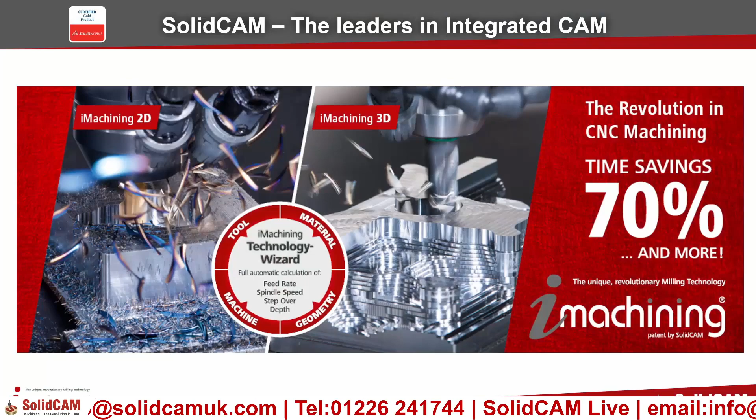So we're first going to have a look at a presentation of SolidCAM, looking at the features and benefits, and also have a demonstration inside the software of the part that's been programmed for today's seminar and how it's been programmed. Then we will cut back to the cameras in the machine to have a look at this being cut live.

SolidCAM are leaders in integrated CAM. The major benefits of using SolidCAM inside SolidWorks are that we have the same look and feel through a seamless single window integration. There is full associativity inside SolidWorks as well, so any model changes made will automatically update the toolpaths in SolidCAM.

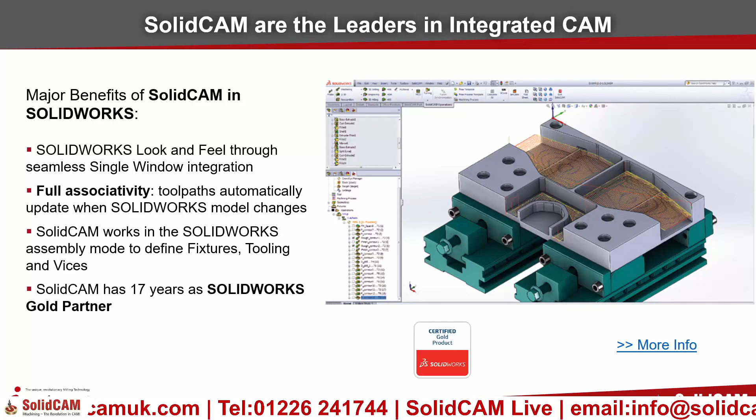SolidCAM works inside the SolidWorks assembly mode to define fixtures, tooling and vices, and we've also been gold partners with SolidWorks for the last 17 years. We have a complete integrated solution inside SolidWorks.

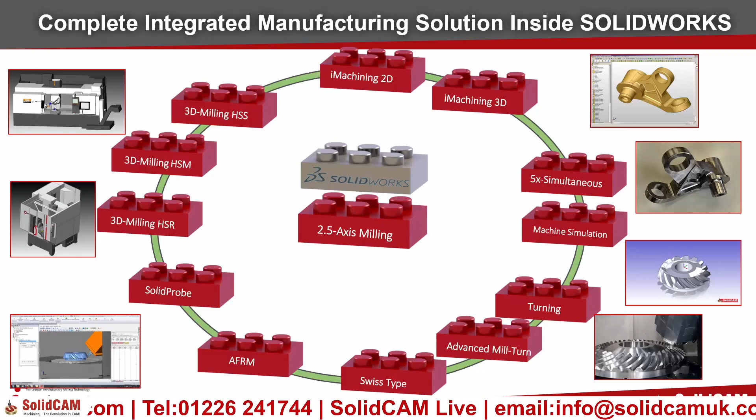We are a modular system, so we can add the specific modules needed, and when needed as well, so you don't have to have all the modules all at once. If you buy a new machine and need extra modules, these can be plugged in afterwards.

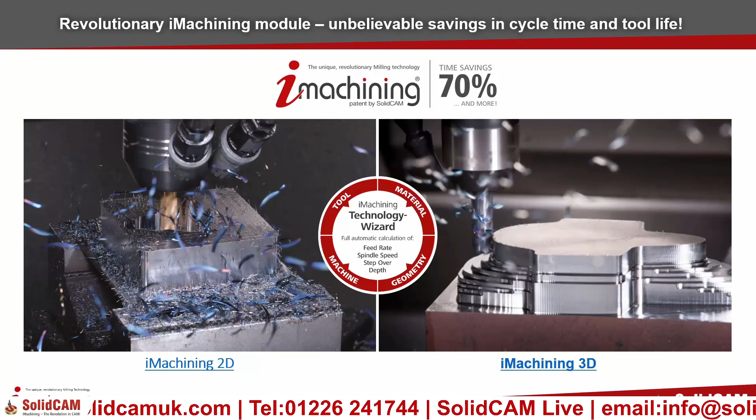Moving on to our iMachining module. This is our high-speed roughing operation inside SolidCAM with a technology wizard built in as well. We get increased productivity due to shorter cycle times, up to 70% and more cycle time saving. We dramatically increase the tool life and achieve unmatched hard material machining as well.

We see outstanding performance when using small tools, and we can use iMachining on 4-axis machines, 5-axis machines, and mill-turn machines as well. High programming productivity and a very short learning curve. The unique wizard will optimize the feeds and speeds for you, including the depth of cut based on the stock and tool material, as well as the machine specifications. So this takes the headache out of programming these high-speed roughing operations.

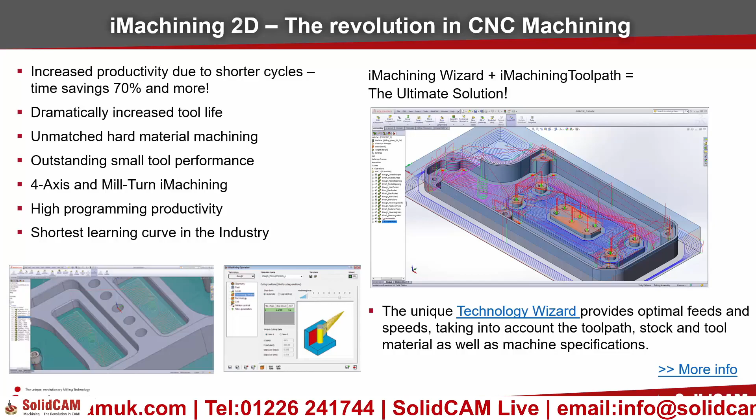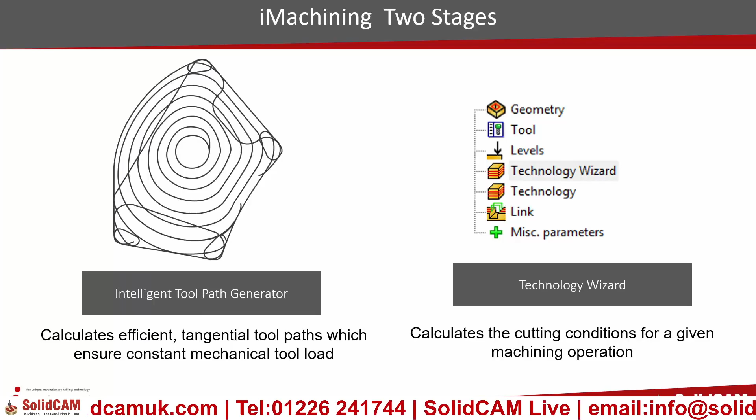iMachining comes in two stages, all built into the same operation. The first stage is to create an intelligent toolpath, an efficient tangential toolpath which will ensure constant tool load on the machine. The second part of iMachining is the technology wizard, which will calculate the cutting conditions for any given machining operation, such as the speed, the feed, the depth of cut, and also the cutting angles, so we can have variable cutting angles.

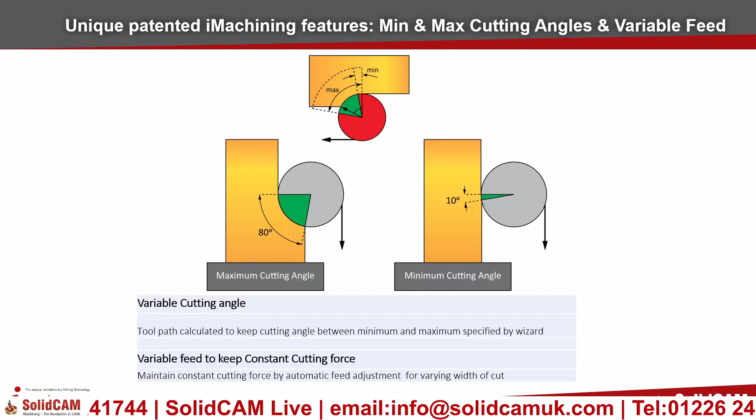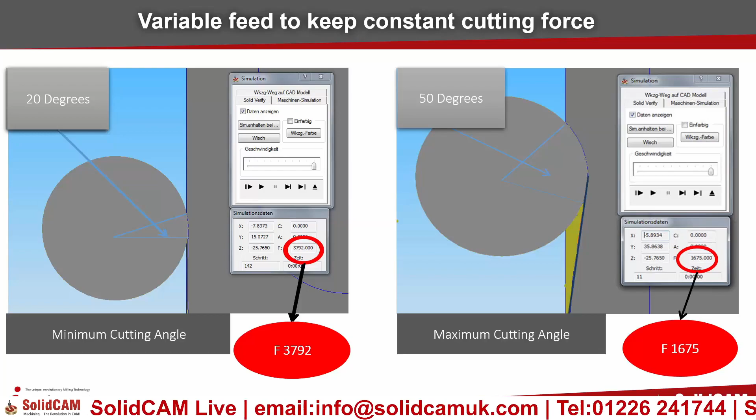You can see there from 80 degrees to 10 degrees we can set the maximum and minimum cutting angles based on what we wish to achieve, or we can let the wizard handle those maximum and minimum based on the material parameters it's been given. You can see on the left hand side at 20-degree engagement the feed rate is a lot higher than on the right hand side at 50-degree engagement. So iMachining will fluctuate the feed rate based on its engagement and contact points as well.

Also, the patented unique features inside iMachining are the morphing spirals, only in iMachining, as you can see there on the left, with a varying width of cut. On the right hand side we have intelligent separation as well for iMachining, so we can separate areas with channels to maximize the spiral area.

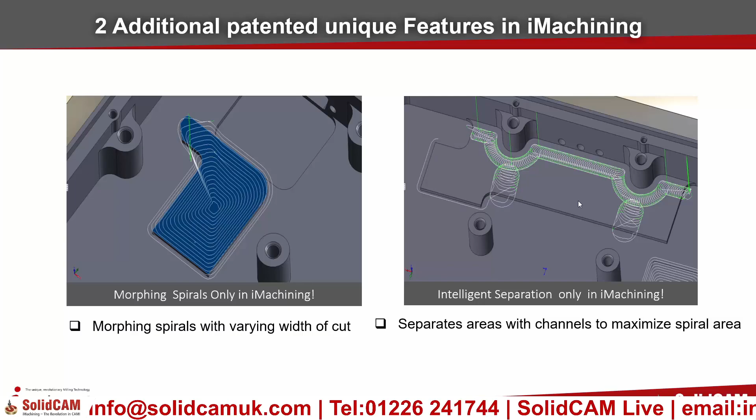So, optimal speeds and feeds for iMachining. The technology wizard will calculate these speeds and feeds for you based on data that we have initially entered. So we would initialize the material properties, we select the geometry that we want to machine, we have the tool geometries, and we put in the machine parameters. This will then calculate all of these that we see in red here. So the technology wizard will calculate the depth, the feed rate, the step over and the spindle speed, all synchronized together.

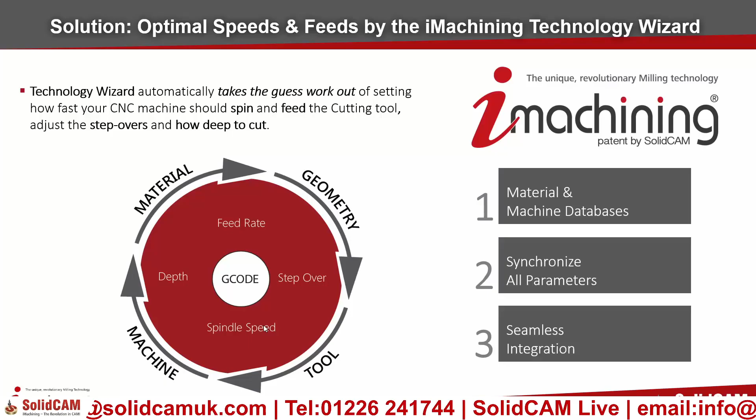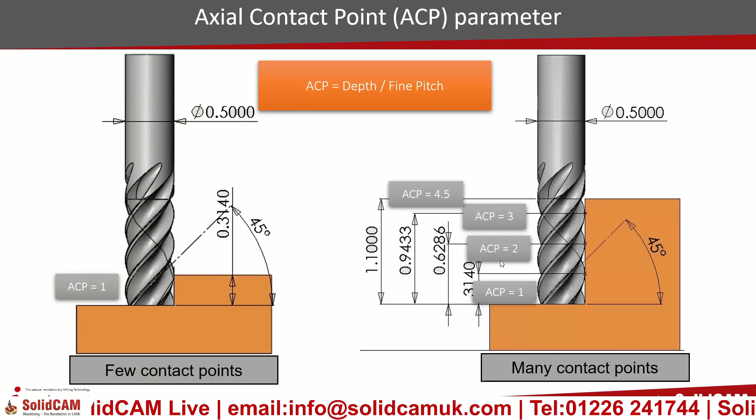Now the depth of cut is calculated inside iMachining, and it is calculated on an optimal depth of cut to reduce vibration. We're looking for an ACP close to a whole number. If you look on the left hand side, ACP1, that is 1 full engagement with the tool - this is minimal vibration. On the right hand side we have many contact points and an ACP of 4.5 as we hit the top, so we have a gap. This will produce vibration based on the fact that the tool has load and there is a flex point at the top. With this one here we're in full contact on the left hand side, so the cutting forces are only now in one direction, to the left. Here an ACP of 3 would be fine as well - we're looking for an ACP as close to a whole number as we can, and again iMachining will calculate this for us.

iMachining is a patented technology. No other system can use our technology. You may see other systems using the spiral or morphing toolpaths, but you won't see any system using a spiral toolpath and also calculating the speeds, feeds and depths of cut using our technology.

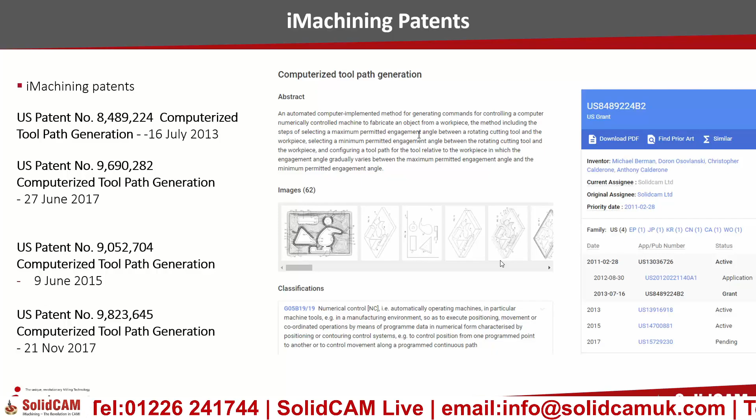So let's have a look at a demonstration of the component that we're actually cutting live on the machine today. As you can see, this is the component. If we just have a quick look at the setup, we've got it held in the chuck there, and we're using this on the Romi DCM 5-axis simultaneous machine.

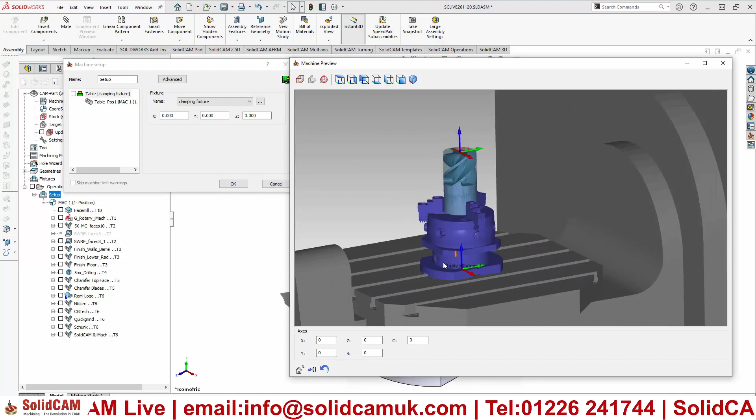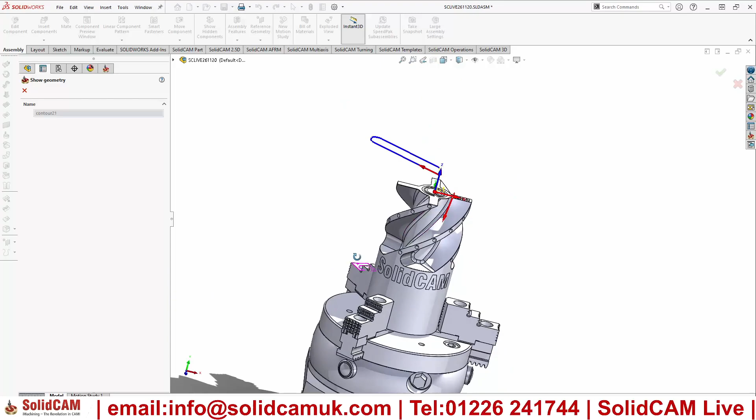So we're going to have a look at the iMachining we've just spoken about and how we've applied this toolpath to this job. If we have a look at the geometry that has been selected, you can see I've selected the wrapped line around there, and the yellow marking at the top shows that that is an open edge. The tool we're using is the 12 diameter bullnose from Quickgrind - you can see it's 12 diameter, 2mm rads, and it's actually a 5 fluted end mill as well.

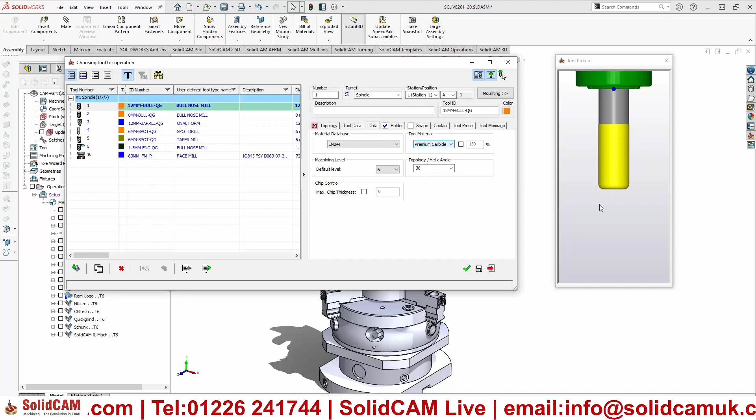We've given it the iMachining data, so here's 36-degree helix angle, and it's a premium carbide, and we're using EN24T as our material. Now the holder is the Nikken holder. Nikken also supplied the solid models, so I've been able to import those straight into SolidCAM.

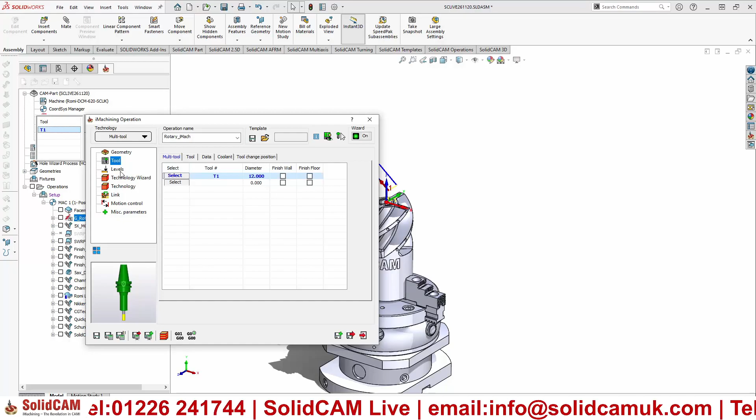So that we can do full collision detection with all our toolpaths. If we have a look at the levels, the upper level is the outer diameter and the pocket depth is down to the inner diameter of this component. The software is telling us we're nice and green, 22.2mm step down, and the speeds and feeds you can see there at the bottom. If I change the machining level, you can see that the speeds, feeds and max step over all adjust relative to each other.

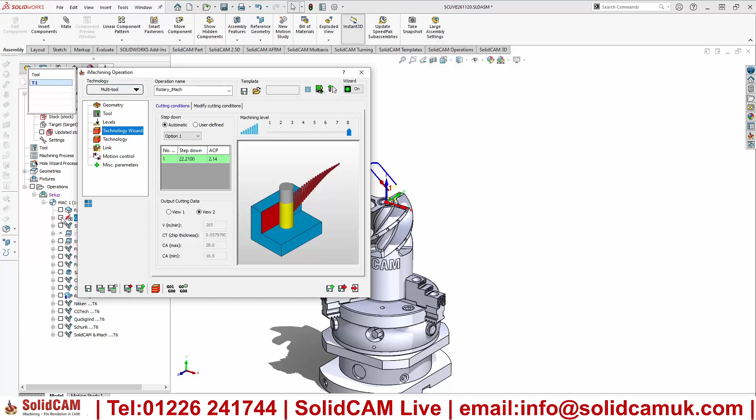And if we have a look at view 2, we can see we're running 165 meters a minute with a 0.057 chip thickness. So if we have a look at this toolpath, you can see we've got that nice morphing toolpath all the way down that slot, and it's actually wrapped around the Z, so this is going to do this in rotary mode, with the C-axis of the machine.

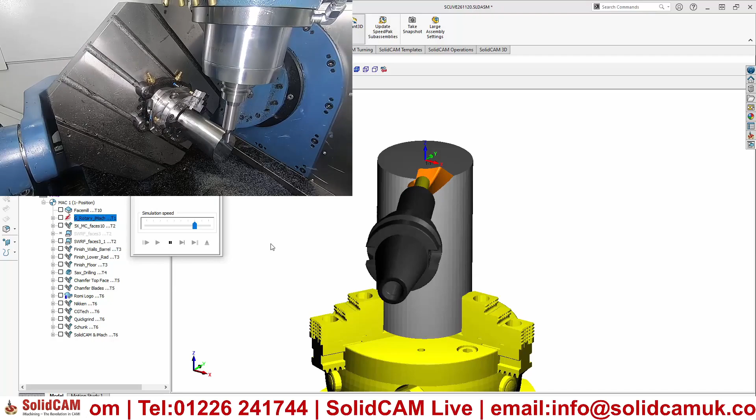So if we have a look at that now, you can see the simulation of that happening. We've got the live cut in there at the top left as well, actually on the machine. You can see that it's wrapped around that C-axis. It's got a nice smooth toolpath. And you can see that in the full machine simulation there as well inside SolidCAM.

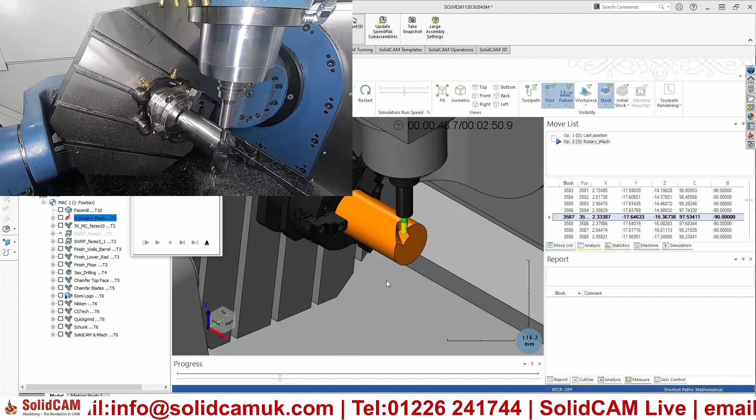So a little bit different to the norm today. We're not just doing iMachining as a 2D or a 3D toolpath. We're actually doing it wrapped around that rotary axis and get that nice smooth toolpath. You can see the chips coming off nicely there. They've been thrown away from the material as well, so they're not going to get trapped inside that slot or anything like that.

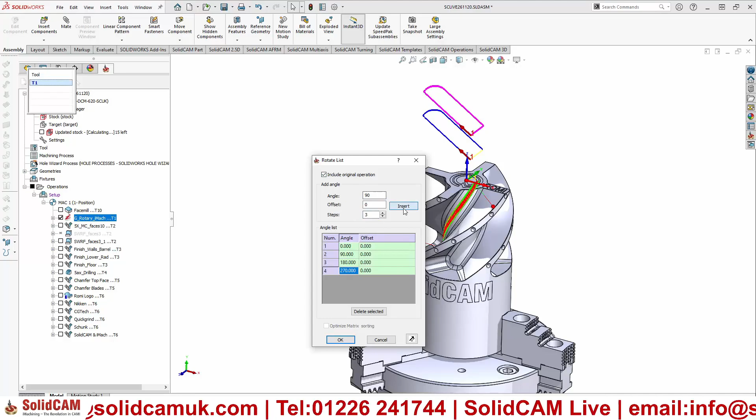So that's one slot on there. We want to do the other 3 slots as well. We don't have to apply another toolpath. We can simply do a rotate, so 90 degrees, 3 steps, include the original, and insert the 3 steps there at 90 degrees apart. Click OK and click Save. You can see that creates that extra toolpath in each slot.

Welcome back. So you can see the machine's still running. It's on the barrel tool at the moment, but we've had a few questions regarding iMachining while we've been running that presentation, so go over a few of those at the moment.

One of the questions: can 3D iMachining also be used for prismatic parts as well as 3D work? Definitely. There's various options within the iMachining package, but the 3D iMachining has a separate option for prismatic parts. The main advantage is if you're doing work like electrical boxes, things like that, where you've got a lot of material to remove, lots of different levels within that pocket, it's just literally say, okay, machine that. iMachining will find all the different levels, apply all the right strategies to the right areas, and machine it as if it was a true 3D part.

It will work the same way. It will take the deepest cuts first to maximise the tool engagement, and then step up to remove all the flatlands on that. So the advantage for iMachining is it's pretty much one click and that part is completely roughed. We'd only have to go back in, small finishing pass over there, and your part's basically ready, it's all done.

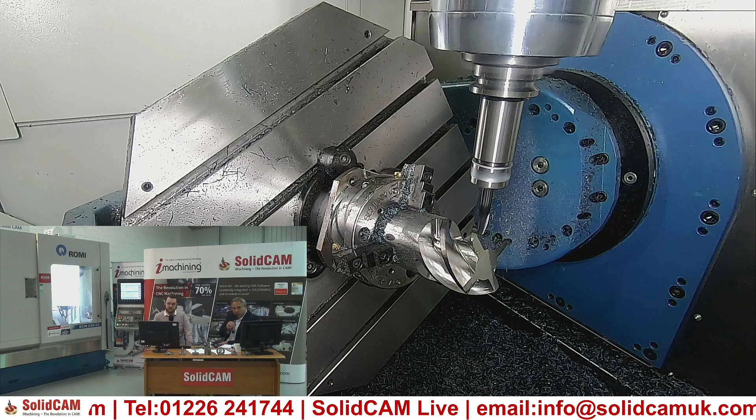You can add materials to it. You can use materials defined in, say, the SolidWorks material library, and suck that information straight across into iMachining. You can use the database, a very comprehensive database shipped with SolidCAM, and add your own materials. Really the only bit of information you need to add is the ultimate tensile strength of the material. Some materials you might need to adjust afterwards, but by putting in the ultimate tensile strength, you're going to get very, very close from day one. The only other thing you may add, if learning from that material, is a machinability factor, so that if you use that material again, it makes those adjustments automatically. So in terms of training, everything else is very straightforward.

And again, if you come on site here, we have the ability to actually prove that on the machines for you as well. So you can not only see it on the screen, you can actually see it live on the machine.

As you say, the training facility is actually here as well—there's a little office you can't see, and at the back there we've got a little training room. So with the training facility being here, we can jump onto the machines during those training sessions and show you things working, show you iMachining and what we're doing. Now the tooling today has been supplied by Quickgrind. I caught up with Graham earlier in the week, had a little chat, so we'll go through that and he'll tell you all about Quickgrind and what they have to offer.

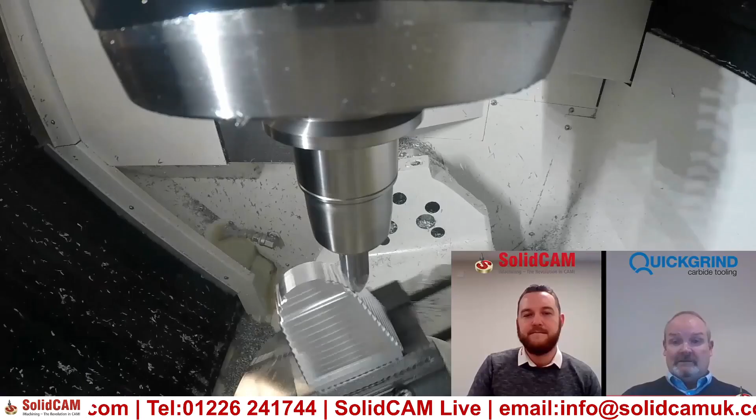Quickgrind is a company—we're a family-run business, been on the go for some 54, 55 years now, still independently run, based in Tewkesbury. We've grown exponentially over the years and now employ over 30 people, with 30 plus multi-axis CNC grinders. The products that we manufacture, we like to think, are up there against the best in the world, and it's a very good company to work for.

So what did Quickgrind bring into today's event? What is it that you've supplied us today? The main thing we're looking at—selfishly, we've got end mills involved, different geometries of cutter, but we're pushing very heavily on the barrel cutting tools. SolidCAM, you're very good at putting us on the spot and testing us for different radius barrel cutters, and basically we can supply any radius. The trial today, the demo, uses an 80 millimeter radius, but more and more, especially driven by the power of software like SolidCAM, it's tailored to the part—the radius of the cutter. Quickgrind as a company, we can produce quickly.

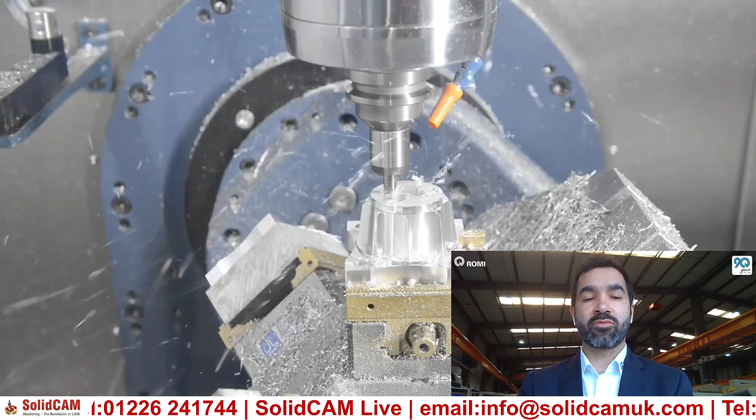Talking about Romi, we are a 90 year old company that for decades has been manufacturing and selling machine tools, injection molding machines, and machine casting around the world. We are proud to be one of the few OEMs in the world to take care of the entire manufacturing process of the products we sell, including casting, machining, wiring, sheet metal, assembling, etc. This means we have everything in our hands, not having to rely on Asian suppliers, for example, so we can guarantee lifetime support for our customers. One of the main attributes of our machine tools - our CNC lathes, VMCs, HMCs, VTLs and so on - is robustness. Considering we have our own foundry as another business, we know about casting, and both our foundry engineering and our machine tools engineering have all the synergy to make the optimal machine structure.

For our customers, it represents high rates of swarf removal and a stable, reliable machine, which means shorter cycle time, less scrap, and in the end, more competitiveness.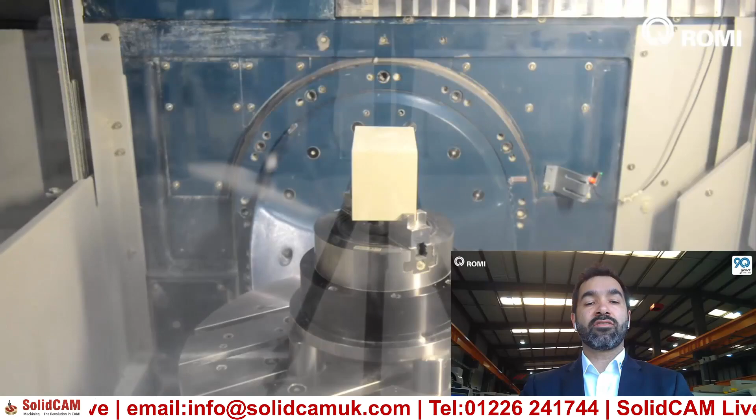Today, as we can see at SolidCAM, we have 3 machines. The first one is the ROMI GL240M. This is a turning center with C-axis and driven tools. It has a 175mm chuck with tool setter, part catcher, and bar feeder preparation. This machine we usually sell for medium and high production for parts up to 260mm diameter by 400mm long, but still it has a very compact footprint.

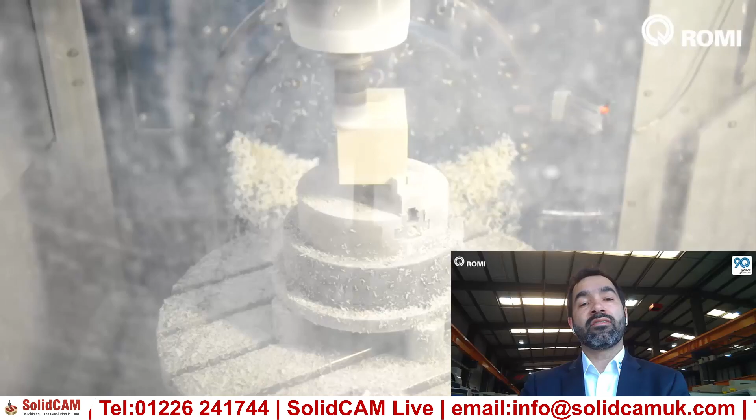The second machine is the D1000. This is a 3-axis VMC with a 10K spindle, 30 tool capacity, and high pressure coolant pump through the spindle. This machine offers all the flexibility of VMCs but with all the robustness of a ROMI machine. It still has a Siemens 828D CNC, which comes with conversational programming ShopMill, making setup and programming simpler and faster.

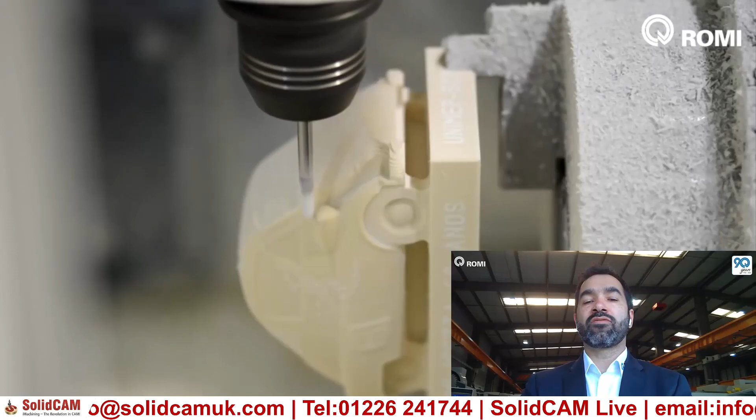The third machine, the last one we see here today, is a 5-axis with a 15K spindle. This is really a full 5-axis machine, and it's a good fit for simple parts with more than one side to be machined, but also for very complex parts that require 5 simultaneous axis interpolation.

If you have any questions about one of these 3 machines or any other machine from our portfolio, please do not hesitate to contact our team here in our headquarters in Rugby. I hope you all enjoyed the seminar today and the live demos.

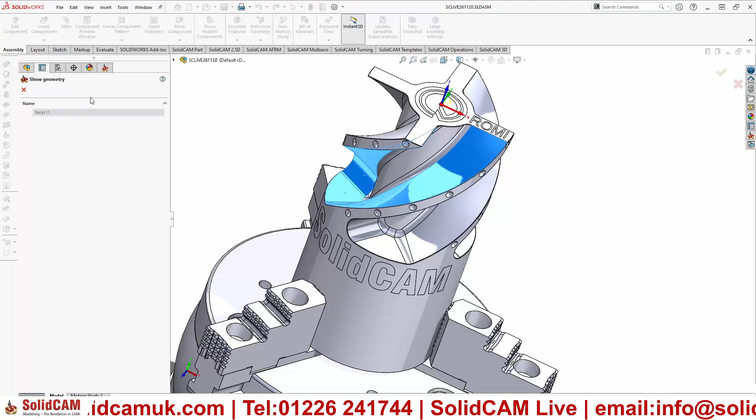Now the tool we're using is the barrel tool from Quickgrind. It's been designed with a 70mm radius on the outer diameter so that we can achieve the best performance across these faces and get a nice clean finish as well. We've also got a 2.5mm radius on the bottom of the tool, so the step down is 1.5mm. I'm also varying the contact angle using the barrel section option, so we're not cutting in the same place on that barrel cutter all the time - we vary the angle as we go down the walls.

You can see here that we've applied the toolpath. It's done all 4 of those slots, and that's again because we have rotated that inside the operation 90 degrees 4 times.

So if we give this a simulate, you'll be able to see the barrel tool working. We've also got the live cutting at the top left hand side there of the barrel cutter going around the component, and you can see that 1.5mm step down with that tool as it goes around those surfaces.

So again, in comparison to using a ball nose, we've got a much greater step down, and we are achieving the same surface finish as we would do with a ball nose at 0.1, 0.2mm step over. So we're drastically reducing the cycle time for cutting these faces and still maintaining that same surface finish that we need.

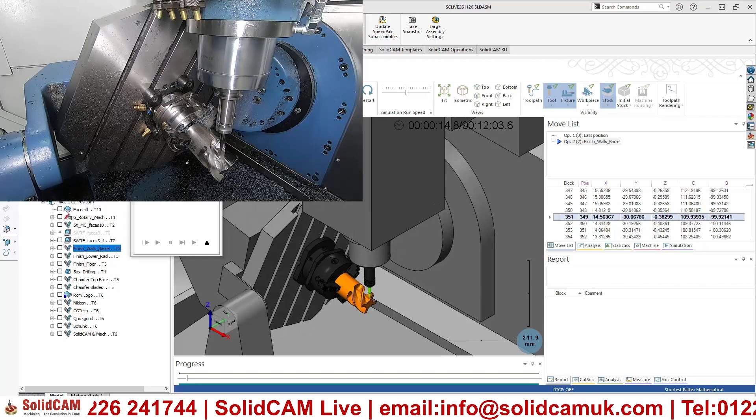Now on this component as well, you can see there are some spot drilled holes around the outer diameter. For this we've used 5-axis drilling, so we simply click on find holes. It will find all holes on that component, and then it will use the 5-axis engine to go around and machine all of those holes, or drill all of these holes.

So again, you can choose from standard drilling, pecking, whatever type of drilling you need to do, and you can see it picked up all those holes quite quickly. You can see it there on the machine running, and all it's doing is just using the 5-axis engine to rotate around to all those holes.

Now lastly, what I want to show you was the engraving that we've done here as well. Standard engraving on the top, the Romi logo just in 3-axis, the SolidCAM and iMachining logo around the outer diameter, again just standard wrapped geometry. However, the engraving inside those blades is done with the 5-axis, tilting away from the blade. You'll be able to see that there.

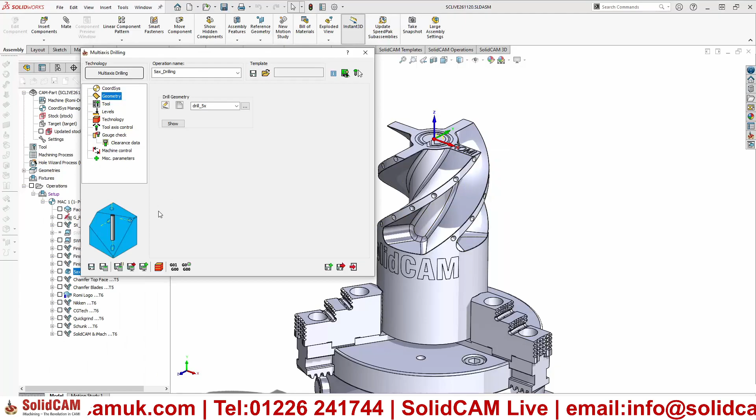I've got checking against the holder, so you can see it tilts around that blade, and we can see that on the machine here. It comes down and underneath that blade. This is just doing the outside shape of the Nikken logo at the moment, and then we can see it go inside there, and it tips in and out to generate the lettering that goes inside that little shape we created.

Yeah, so as you saw in the presentation there, I showed the 5-axis drilling. It's 5-axis drilling at the moment, live on the machine, so you can see that going round the component. You saw how easy it was to pick up those holes. It's simply just a click of a button, find all holes.

You can obviously use filters as well if you've got a component that's got different size holes in it and you only want to find one set of holes, so say all the 5mm holes. You can use the filters, click find holes, and just pick up all the 5mm holes as well.

We've had a question as well while we've been watching that. Oh, sorry, the machine just stopped. That's my fault, leaving it on op stop. Proves it's live. It does prove it's live.

So now it's going to do the chamfering as well. It's going to chamfer around the top, and then we've got that 5-axis chamfering going around the blades as well. So like I said, there was a question coming as well.

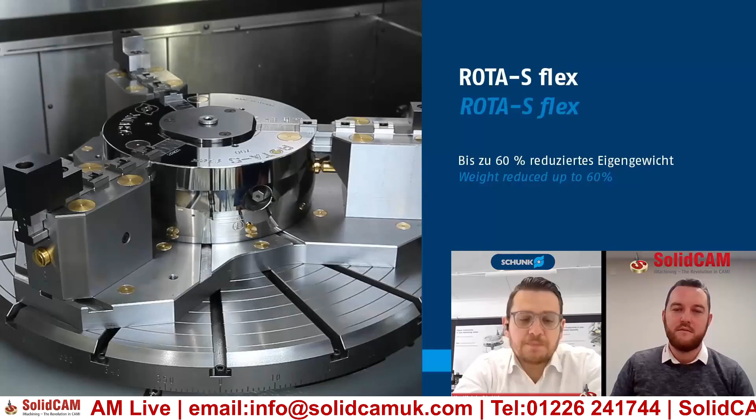Starting from very simple work holding solutions, namely mechanical vices, all the way to very specialist tombstones or special jigs or hydraulic expansion mandrels, going into automation - end effectors for end-of-arm robots like grippers, and the combination of both sides where you'd go to machine tending, which is the buzzword at the time. We'd have a complete solution for something like that as well. It's hard to put everything in one quick presentation - there's about 11,000 products on our portfolio, and we also do a lot of special applications every year, because that 11,000 is not quite enough.

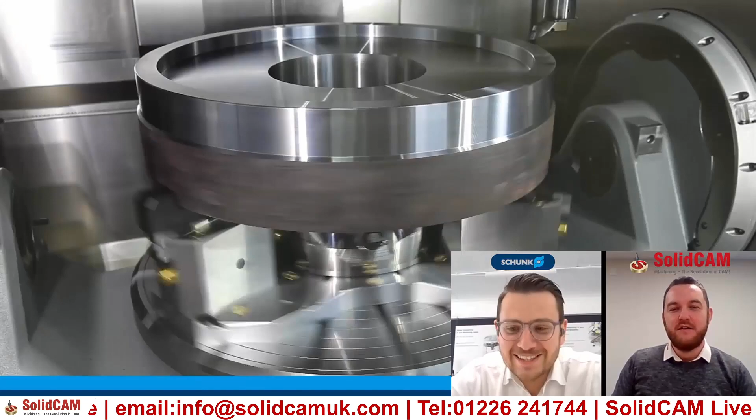Yeah, very good, keep yourself very busy then. It does indeed, yes. I mean, you touched on it there as well about the chuck that we're using - do you want to explain a little bit more about the chuck that you supplied for today's event?

...unusual, I guess, or not common to see people using a chuck for turning, milling, 5-axis application. People's brains go directly into a lathe or turning when they think of a chuck, but it's a much more versatile work holding solution than people actually realize. And then I think you guys can say better than I can how much easier potentially this has made your life, having a cylindrical part, a round part that normally would be fairly challenging to centralize on a 5-axis.

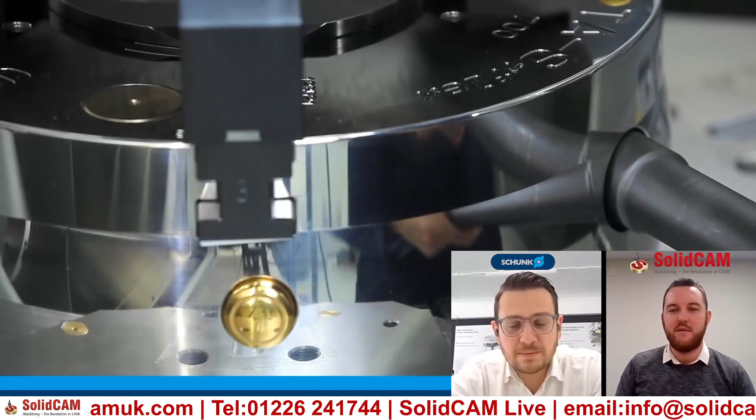Yeah, definitely. I mean, obviously using the chuck, we don't need to try and centralise it each time we put the part in. It was much easier to hold the round billet rather than trying to prepare it first and then hold it in the vise. So yeah, it's been very good using the chuck, and the gripping power that it's got has been quite good as well. We've obviously been using iMachining and some fast metal removal on there, so it's held up quite well on the machine as well.

So I'm quite impressed with that. So yeah, I mean, are you guys - obviously we're in strange times at the moment - are you guys still operating as normal? Are you still open for business?

Yeah, it's been a challenging year, no question, but it has been also very good. We had some very large projects, we're operating as normal, we're very busy. We had some very nice applications coming from the aerospace, which is surprising at a time like this. The split of the company carries on very much the same - we're getting 60% of our revenue coming from automation, 40% from work holding, and we're trying to get busy with events like this, like we're doing today with yourselves.

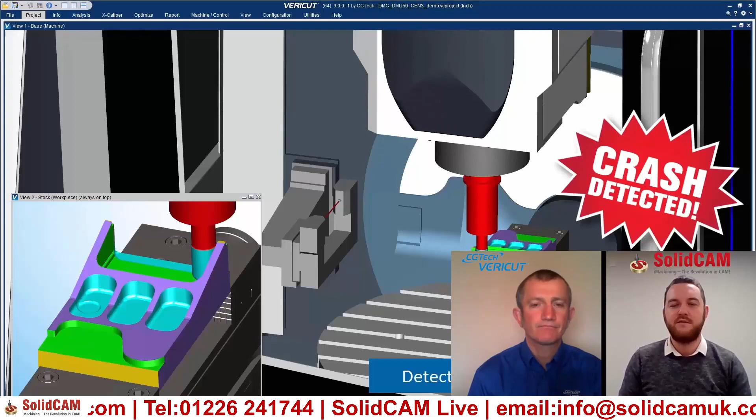Yeah good, well I noticed you got a new release out around about September, I've been using that for this event. What's the sort of new enhancements in that that you've got? Yeah so that got launched in September, that's 9.1, so that's our latest release. There's a few patch releases after that, but it's all about making the user's productivity a lot more efficient, Ben, really. Enhancements to something called auto diff, which is the automatic difference between your design model and your cut stock, that's something the product's capable of doing, and that's to prevent any gouges or excess material once you've machined it. There's also enhancements for our force optimization package, or bolt-on if you like, and that's again all about making it as efficient for the user to get the most out of the product as quickly as possible.

So there's a few enhancements in there. There's something called learn mode, so we can learn from the NC program to optimize the original code, making it slicker, and it means the user doesn't have to get as embroiled in the software. That's the push from our point of view - it's making the user more efficient, with a lot more user-friendly tools.

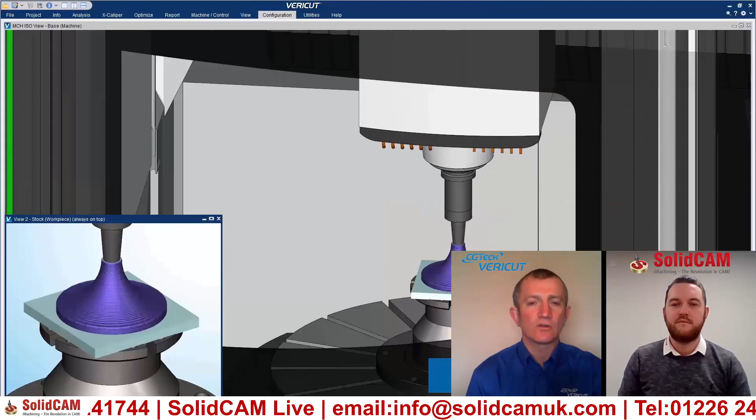Absolutely, yeah. So I mean, obviously we're in strange times at the moment. Are you guys still operating as normal? You got plans for 2021 yet? Well, I mean, the last 8 or 9 months has been very, very strange.

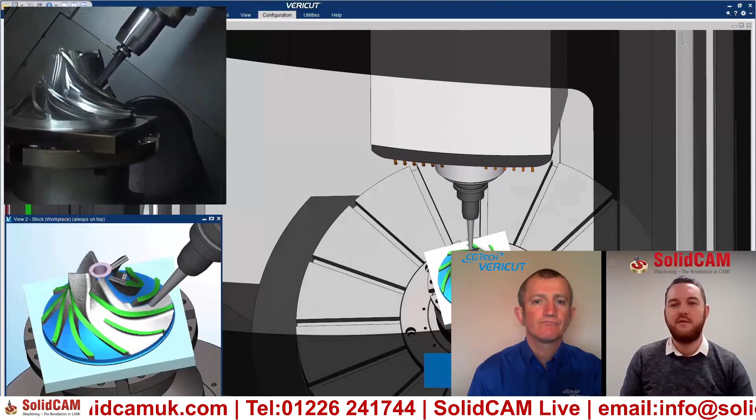But yeah, the majority of our lads work from their home offices anyway, certainly the support guys, so that's been business as usual. We're making the emphasis on supporting our customer base, encouraging new users to come on board from a sales perspective. So it has been tough over the last few months, but we can see light at the end of the tunnel. There are some people struggling, but some doing pretty well out there. As far as 2021's concerned, we've got an optimistic view that come back end of the first quarter, early second quarter, hopefully it'll be back to some form of normality. So we're making plans for 2021 along those lines, certainly from a marketing point of view - exhibitions, open houses, that sort of thing - trying to get one step ahead and get those plans in place.

Yeah, very good. Yeah, it's good to see. We all need to get back to some kind of normality at some point, don't we?

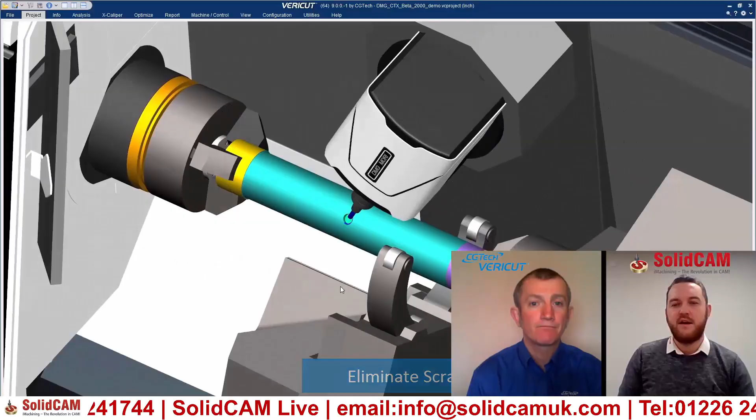Thanks for that, Tim. It was great to catch up with you earlier on this week. We had a good chat about a few things. We've had a question as well. The machine has stopped at the moment, so that's it finished.

We've had a question here: is it possible to do pinch milling in SolidCAM, like for example on a twin turret machine? Absolutely. Everything we've shown pretty much up until now has been on the milling side of things, because we're showing it on the 5-axis today, and it's a 5-axis based seminar today. We are just about to change it and show a little bit about some of the mill turn stuff, specifics on sliding head style machines. This comes into play when we've got mill turn machines with 2 turrets, and we want to be cutting with opposing tools on both upper and lower turrets simultaneously. So absolutely no problem at all - you can program them individually and then use the synchronization codes within SolidCAM, the wait codes, to make them work together.

So you'll see a little bit of that on the presentation which is just coming up. This is based on a Citizen M32 machine, and it's time for me to do some more work. So, over to you, Mark. Thank you.

Even adding more complex machining strategies such as cylindrical milling is kept simple. Select the area to machine direct from the model, the tool, and SolidCAM does the rest.

Once the programming is complete, the channels can be optimized to get the best cycle time on the machine. Currently the part is programmed as a single part, but in reality we want to be working simultaneously on both spindles. This is done by selecting the operation to start machining on the second spindle.

Now we can see the operations working together in all 3 channels. Based on this, SolidCAM will automatically choose appropriate machining patterns which can be reviewed and changed by the programmer, as in some cases alternate patterns are available.

The programmer has full control over the positioning of the wait codes, and SolidCAM will assist this by dynamically checking and advising any issues.

Now the complete program can be simulated as it would be cut on the machine with all axes working together. This highlights any potential collisions and will show any superimposition moves programmed, giving confidence the program is correct before being passed to the machine. This can significantly reduce machine downtime.

Once this has been proven successfully, the G-code can be created in a single click, and here we see the result displayed in our SyncMaster software, clearly displaying wait marks and axis patterns.

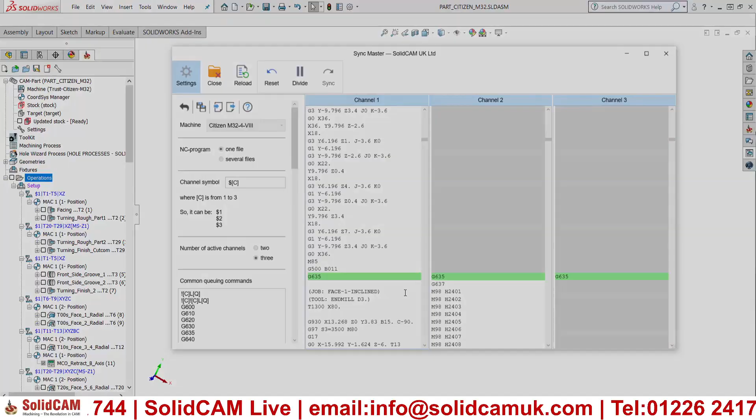So Ben's just taking the part out now and he'll show you on the camera, just to show that's what we've been working on, that's what we've cut today. You can see all the engraving around the flanks, all the 5-axis drilling, all the nice finish you're getting with the barrel tools on. So yeah, we can see everything which we've been working on.

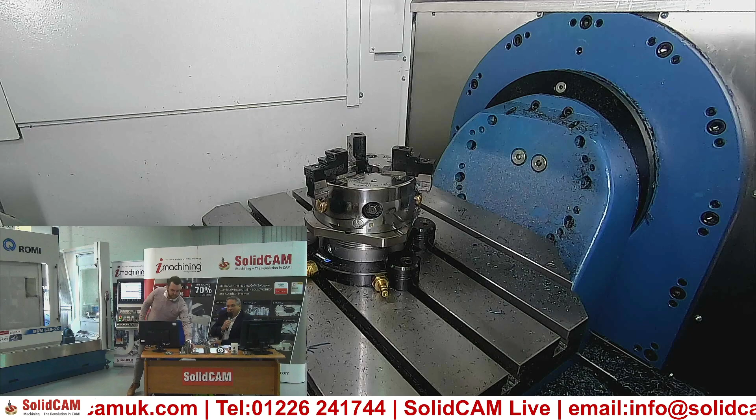And so you can see on there, obviously, the machining time we've had on there. We've stopped the machine a couple of times while we've been talking and showing presentations, so that we can highlight certain areas which we think is worth watching for you. So the machining time was fairly straightforward, fairly quick on there.

Now, just in summary, SolidCAM provides solutions for basically all types of machining, whether it's milling or turning, based from 2.5D right up to full 5-axis iMachining on the milling side, through also to turning from basic 2-axis to 3-axis with C-axis, right the way through to sliding heads.

Everything works consistently the same way, so it is very, very straightforward as a product. We cover the full range of disciplines as I've just highlighted.